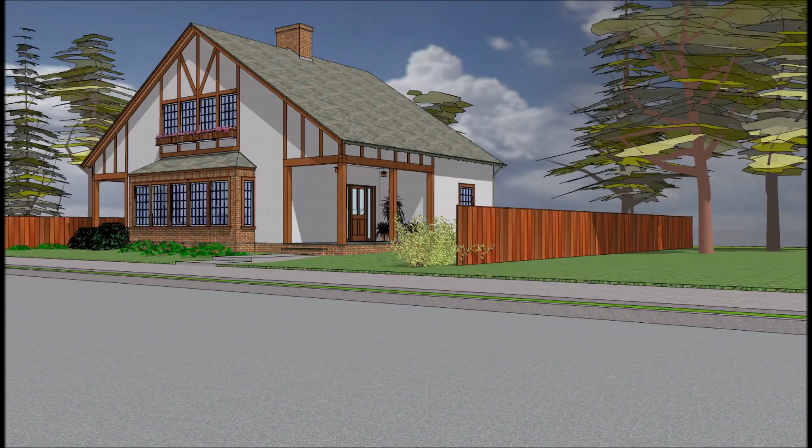Are you thinking of designing your own house or maybe working with an architect or residential designer? If so, you'll be exploring options on how to bring out the character of your home through the choice of materials and also practical options such as how to handle the garage. This is what we'll be looking at in this video.

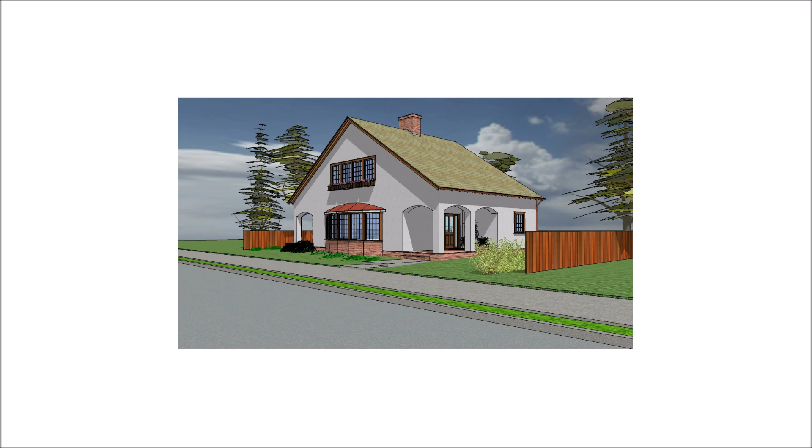Now let's move on and look at some of the different options we can develop from this base plan. Here I've taken the base model and I made one change to it in terms of the exterior material palette. I've substituted flat clay shingle on the roof. This was a material that was very popular with Voysey and Buckland. I've kept the stucco, the sandstone base, the simple segmental arches.

Here's a look at the ground floor. The original plan with a small change without a garage. So we have the entrance via a porch on the right. Come in the front door into a small lobby space. The living room is ahead of you. In this case, I've shown the living room with a square bay. And then beyond the living room is another porch, on the private side of the house.

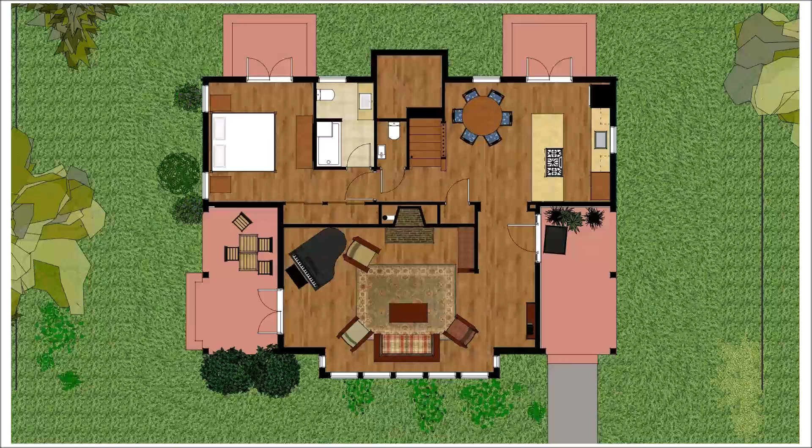Coming in the entrance and going to the right, you have a kitchen and dining area. There's a staircase, a powder room, and a master bedroom suite on the ground floor. I've given the staircase, well, we'll see that here. I've given the staircase a square bay that projects out, and you'd actually have enough space to put a little easy chair and drink your cup of tea in the morning looking out over the garden. This is a very tall window that would bring a lot of light into the center of the house, both upstairs and downstairs.

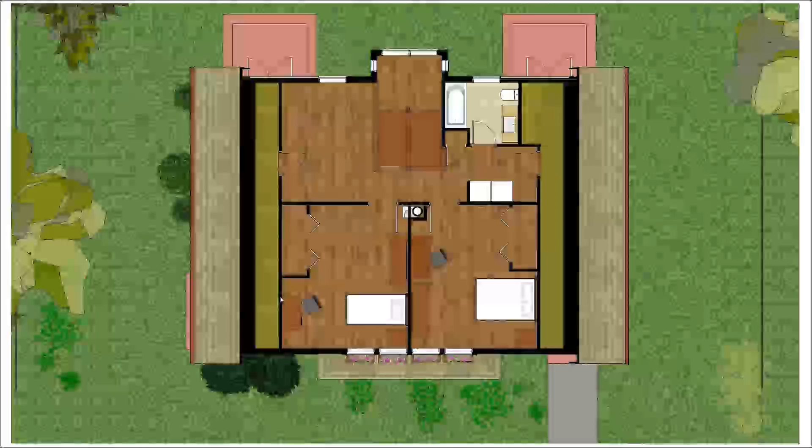When you reach the top of the stairs, there's a large landing area, large enough to be a bedroom, and that's going to be an option we'll look at, but I've treated it here as an open area that could serve as a play space or a study. Opposite side of the staircase, there's a bathroom and laundry area, and then two large bedrooms facing the front. In addition, under the low parts of the roof, we've got a bit of attic storage. So that was the base plan.

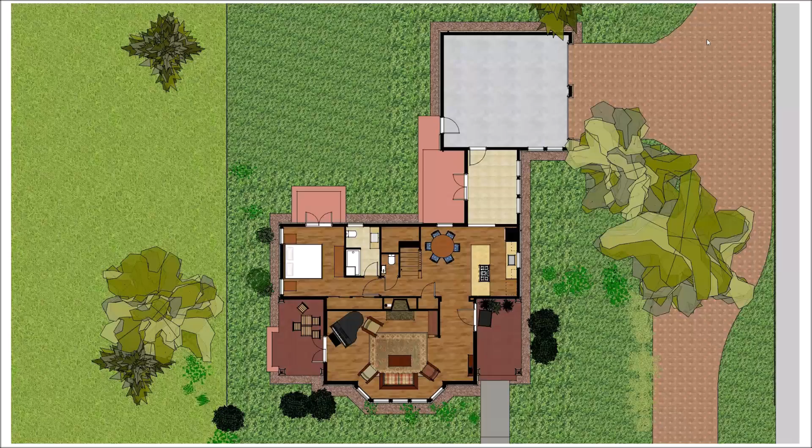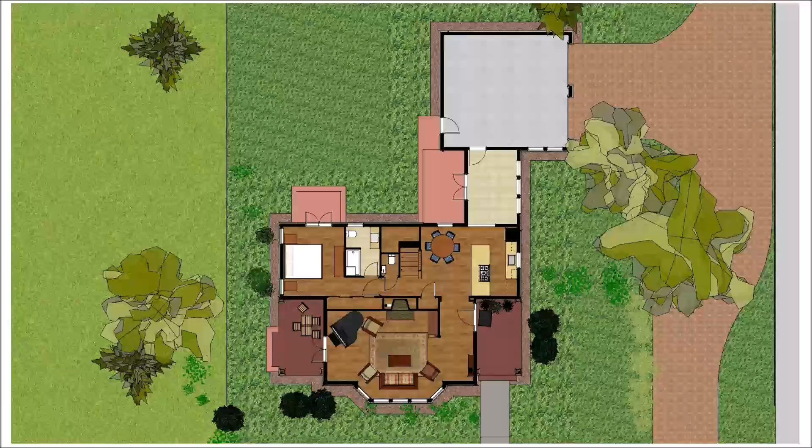And at the bottom of the screen we see the angled bay window. Now you could do a lot of mix and match. You could mix one palette of exterior finishes with any of these floor plans. So these are not the sum total. Upstairs I've shown an option where that large landing area at the top of the stairs is enclosed to make an additional small bedroom. Let's take a brief look at these in 3D in these three little videos.